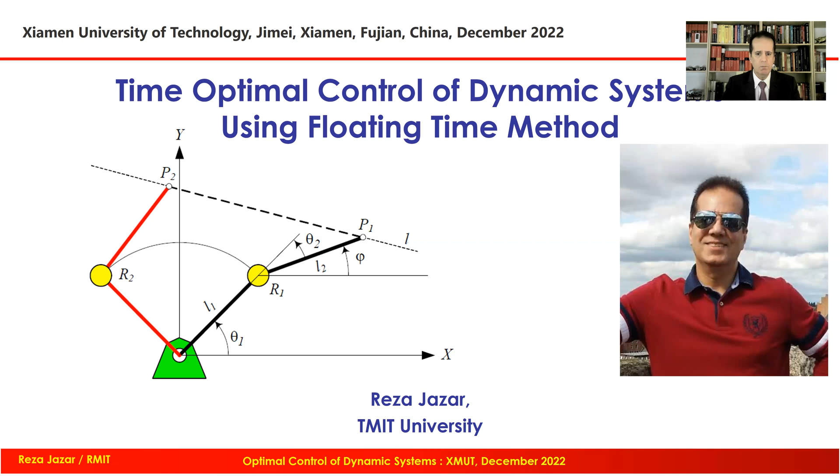Before starting the technical aspects of my talk, I'd like to share with you a few photos from Xiamen University of Technology. I was lucky to be there several times for teaching, research, and speeches, and I am hoping that it happens again, since during the past two to three years no travel was possible because of Corona. That's why we are presenting this research by video.

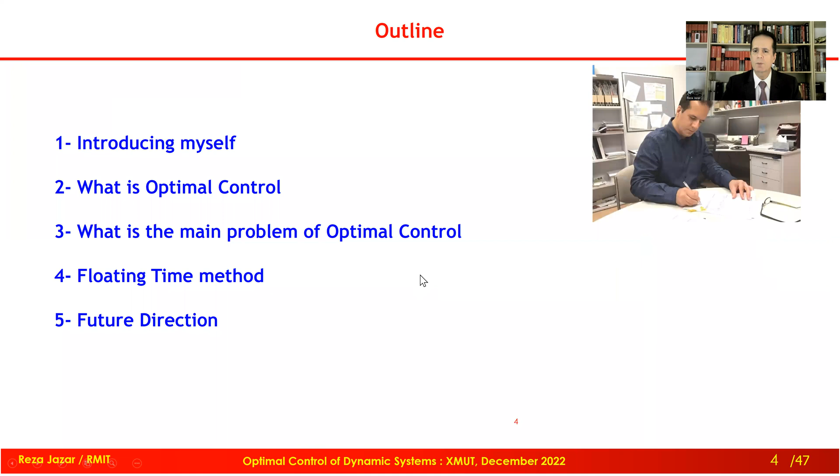Let me skip this part. I'd like to introduce myself a little bit and then talk about optimal control, the main problem of time optimal control, and then the floating time method, and probably discuss a little about the future of this problem.

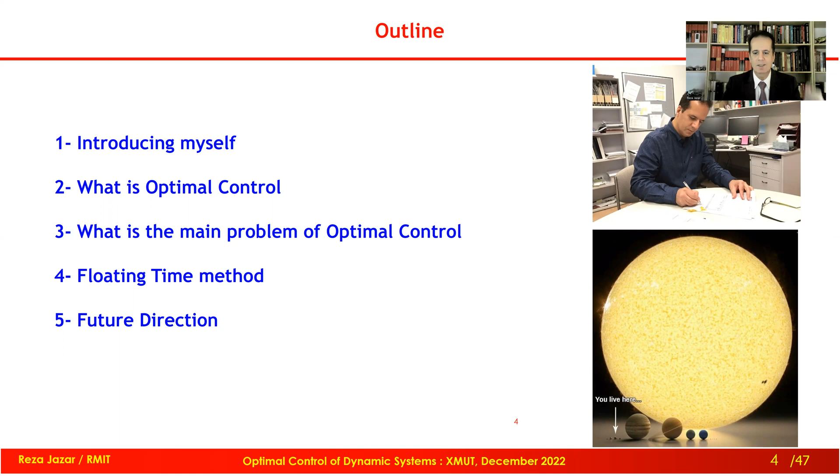On top right, you see me in my office here at RMIT, and I always put this photo, the picture bottom right, to remember that we are nothing basically in this huge world. Okay, so just remember to turn on your mobile phone after leaving the session.

This is my appointment at the moment. I am a professor of mechanical engineering here at RMIT Melbourne, Australia. I'm also honored to be adjunct professor of a few universities.

One of them is Waterloo University in Canada, which is the place that 20 plus years ago I was a postdoc, one of the best universities in Canada.

Also, I am distinguished adjunct professor of XMUT, and it is a great pleasure to be part of Xiamen University of Technology. Also, there is Ocean University, Xiamen Fuzhou, where I am adjunct professor as well - a fantastic, unique university in the world. Not many universities are doing what this university is doing.

For education, I graduated in nonlinear vibration and applied mathematics, and my master's was in robotics. In that master's, I introduced the floating time method, and I worked on that method, the thing I'm presenting to you today, for a few years. My bachelor's was about internal combustion engine design and so on.

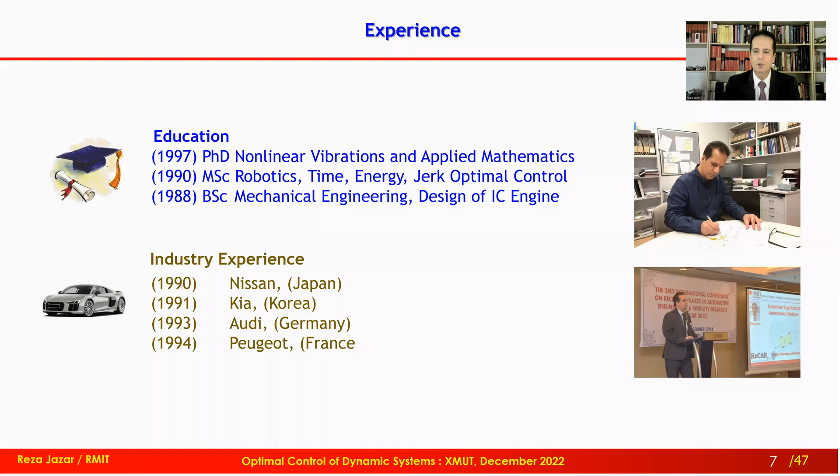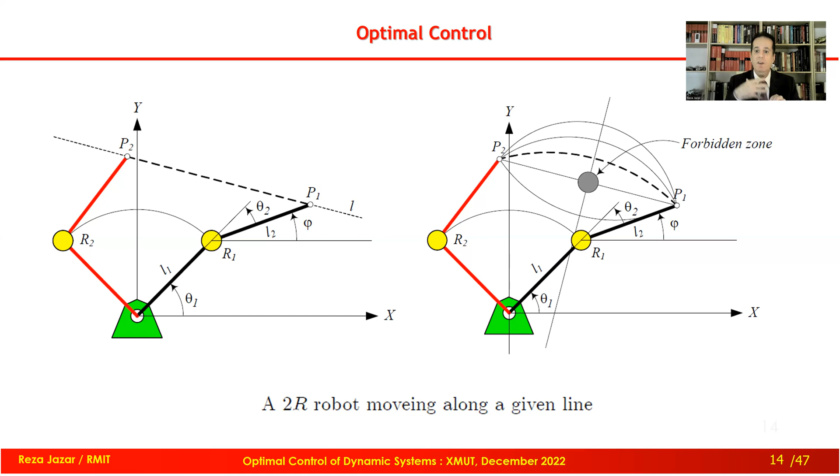And at the end of the second hand, point P, there is a payload. So this robot is carrying something. Now, how can we control these 2 motors to move the tip point, the payload, on the path that we wish in minimum time? That's the problem.

Okay, before going further, let's talk about optimal control, where and when it appeared in academia. Everything started with brachistochrone. Brachistochrone was first defined by Galileo in 1630 something, and later on by Bernoulli around 1690 something.

He introduced it. Bernoulli was a member of a family - brothers, father and son, grandson. The whole family were geniuses, very talented in mathematics. I believe it was Johann Bernoulli who introduced this problem for the first time.

Now, what is the problem? Under gravity, in a vertical plane, there are 2 points, point P1 and point P2. From P1 to P2 we have a wire. The shape of the wire is not changing, but we shape the wire.

Then on the wire there is a bead. We let the bead go, it slides on the wire, frictionless, and reaches point P2. We wish it goes from P1 to P2 in minimum time. Now the question: what shape of this wire gives us the minimum time? So it is a sort of minimum time path problem.

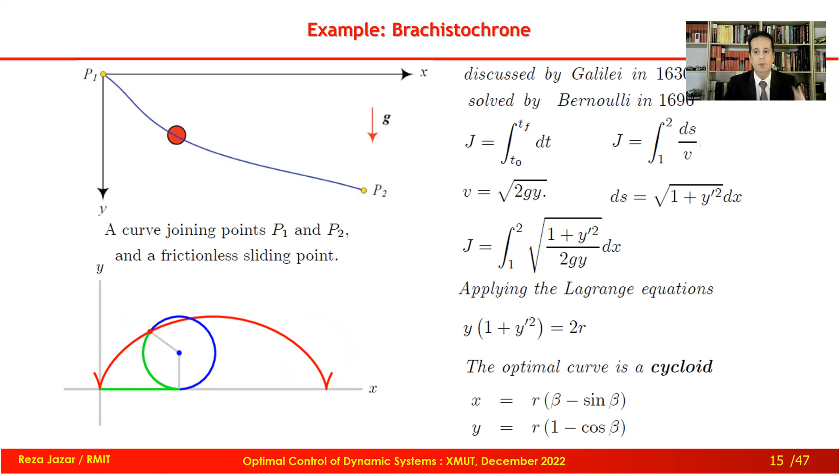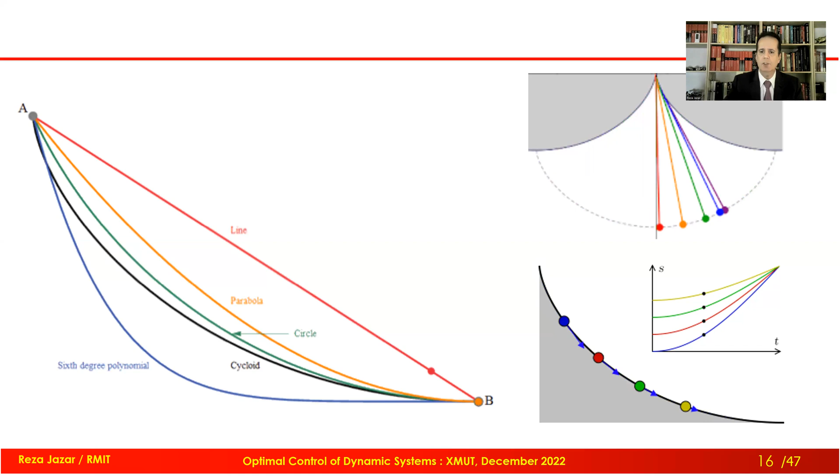Other guesses here, as you can see, parabola, line, or any other shape are not working as good as cycloid. Cycloid is the best solution. There are other applications on the right, and you know better. I skipped the explanation of them to save time.

Okay, I said that Euler tried to solve the brachistochrone problem differently, and that different approach introduced a new knowledge, a new science. Today we call it calculus of variations. Calculus of variations was something that Euler invented to solve brachistochrone. And today we know that calculus of variations is the base for optimal control.

There are some boundary conditions, meaning we know the value of x. X is the independent variable, and y is the dependent variable, so we are looking for y as a function of x. This is the solution of minimization of that functional J. The boundary condition is that we know x at the beginning and at the end.

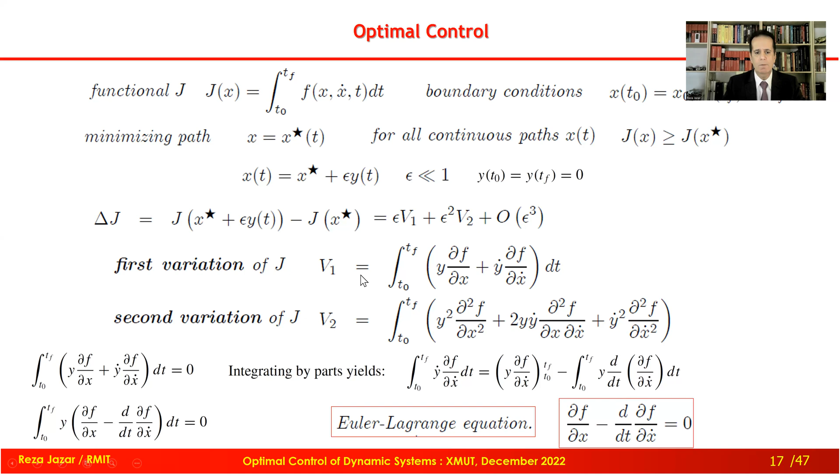Now let's look at this problem in a practical way. Let's assume we have a mass, like a car, like a box on a table. From some point x0, we are moving to xf. So from one point to the other, we are pushing a force behind it. This force can be positive or negative, so it is accelerating or decelerating. And I want to move this box from here to here in minimum time.

Let's assume there is no friction. If there is no friction and this force can go to infinity, I can go there in zero time, right? So whenever we are talking about time optimal control of a dynamic system, there is a constraint: actuation or force is limited. It cannot go to infinity. There is a boundary for driving force, a maximum and minimum. For simplicity, assume maximum and minimum are equal in absolute value, for example positive 10 Newton, negative 10 Newton. We can change them later. So when force is in the middle, it's zero force.

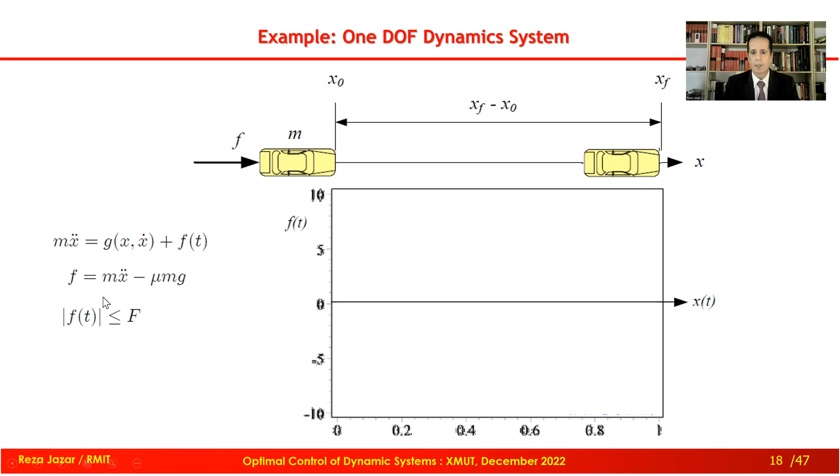That's the solution. The equation is given on the left, in the second line, you see F, which is actuation force, is equal to m x double dot minus mu mg. Mu is the friction coefficient, mg is mass times gravitational acceleration. So if there is a mu mg term, then F would be different. At the moment, let's assume that mu, friction, is 0. This is what we are going to do, and this is the solution.

Force is equal to maximum. Let's assume the maximum force is 10 Newton, and m is 1 kilogram. We apply the force 10. At the middle, meaning half a meter movement, we switch to braking and we stop at the end.

Now let's assume that friction exists, it is not 0. If there is friction, friction helps us to stop and prevents us from accelerating. It means I have to apply positive F a little bit more and then switch to braking. That switching point is important. The whole problem depends on the switching point, because we know that at the beginning we must apply maximum force, and at the end we must apply negative maximum force, or braking. Somewhere we must switch; that switching point is important.

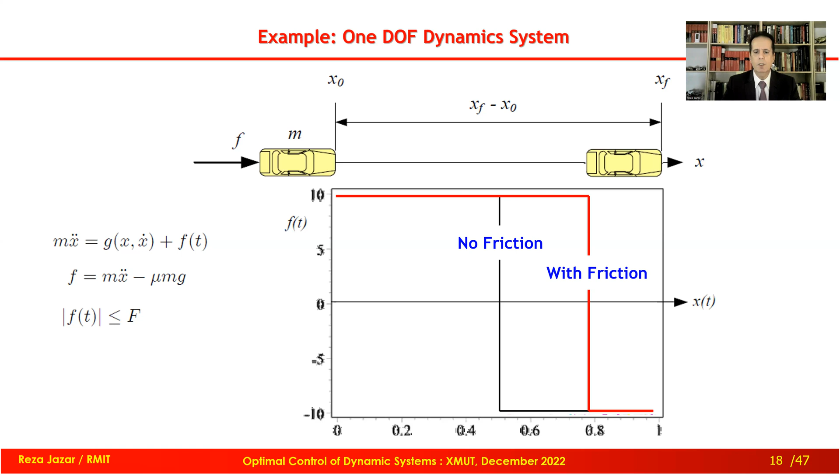If the dynamic system is 1 degree of freedom, the switching point can be found analytically. If it is multi-degree of freedom, it cannot be found analytically, so I am going to explain. But before going to multi-degree of freedom, let's see a solution when friction is there. The red one is the solution with friction, some value. At the moment, I'm explaining the problem.

Now let's assume that we have a multi-degree of freedom system, like this shuttle arm. You know that a shuttle arm is something similar to the hand of a human; it has 7 degrees of freedom. Shoulder, here, there are 3 rotational degrees of freedom. You can try 1, 2, 3: 3 rotations in the shoulder, 1 rotation in the elbow, and 3 rotations in the wrist. Totally we have 7 degrees of freedom.

Before going further, let me give you an explanation. 7 degrees of freedom looks strange. Why? Because when we want to locate or move a rigid body and bring it to a specific location in a specific orientation, we need only 6 degrees of freedom, not 7. So 7 means we have 1 extra degree of freedom. Why do we have 1 extra degree of freedom in our hand? What can we do with that, with our hand, or in industry with the extra degree of freedom of a robot?

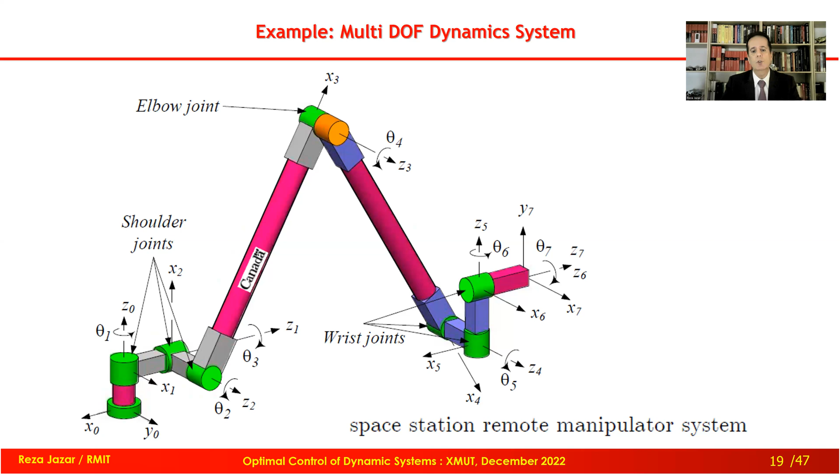Here we have 7 degrees of freedom, but it can go up to infinity, for example 10 degrees of freedom. What do we do with an extra degree of freedom? That is out of the scope at the moment, but you understood what a multi-degree of freedom system is.

Usually an industrial robot, if fully operational and fully actuated, must have 6 degrees of freedom. Usually 3 degrees of freedom go to the main arm, and the other 3 degrees of freedom go to the wrist. Here you can see a spherical wrist and a spherical arm, so totally you have a spherical robot with 6 degrees of freedom.

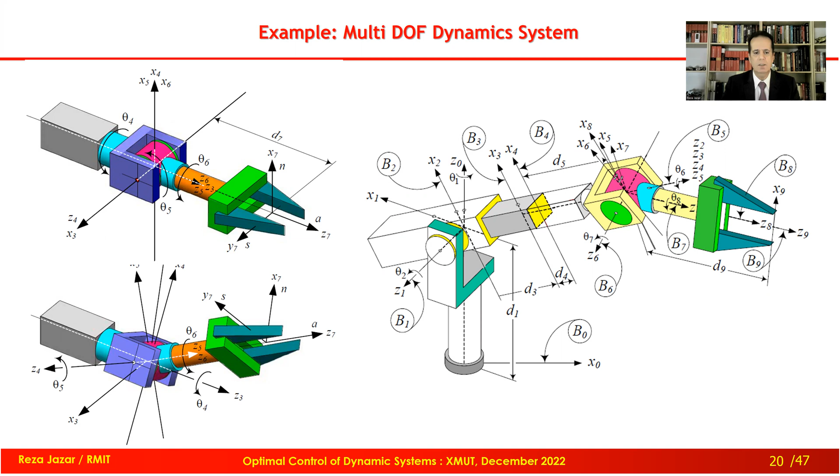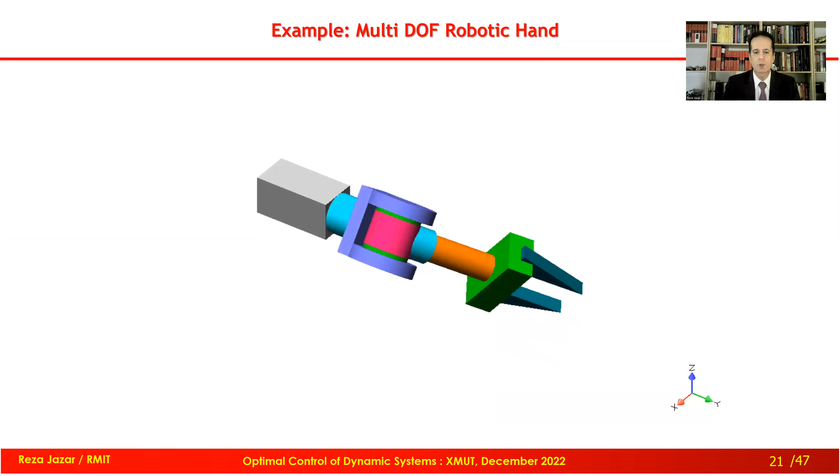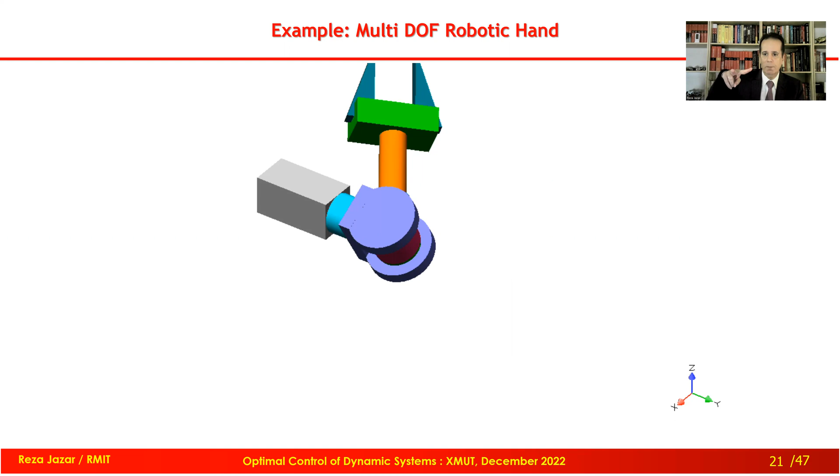Here you can see the motion animation for that wrist, which is showing 3 rotational motions for that. And there is another degree of freedom for the gripper to close and open to hold, but that's not a degree of freedom of kinematic motion.

Okay, now we know what is a multi-degree of freedom system. And I mentioned that switching point is missing. Let me re-express what is the minimum time control of multi-degree of freedom.

Imagine a 2R robot that at the beginning I introduced to you, 2 motors. If for 2 motors we apply the maximum torque that they can support, then the tip point is not going to move on the path that we design. So there must be a ratio, there must be a proportion, there must be a relationship between these two according to the equations of motion and the position of the end effector, inverse kinematics, and so on. All of them are in robotics.

But what is the solution of multi-degree of freedom? I said it is not possible to find the solution analytically. So what can we do? We need a numerical method. How do we know that a numerical method is actually the solution when we gain it? Everything goes to this gentleman, Pontryagin. Pontryagin was a Russian scientist, mathematician.

Around 1950, 1960, he and a few other mathematicians worked on optimal control in general, and he mentioned something that when I explain it, you understand it makes sense. He said, the optimal control solution of a multi-degree of freedom system will be achieved when at any instant of time, at least one of the actuators is saturated. So if we are able to find this pattern that at any time, at least one of the actuators—I'm talking about the 2R robot at the moment—one of the motors is saturated, meaning at maximum or minimum, then we have the solution. Looks very simple.

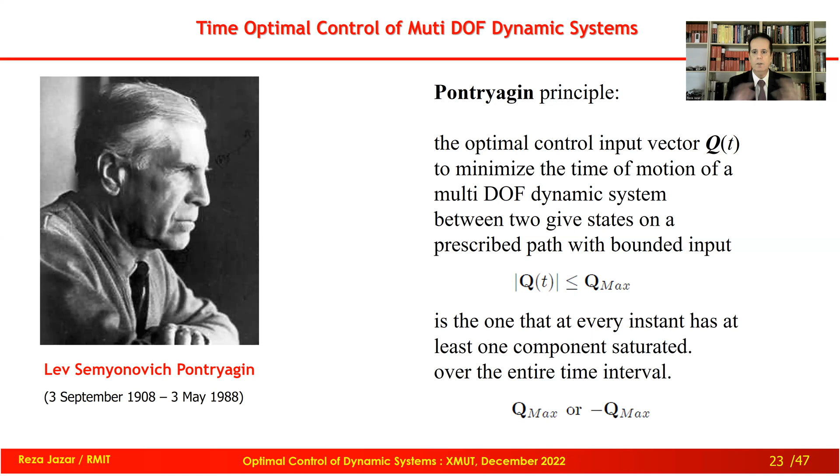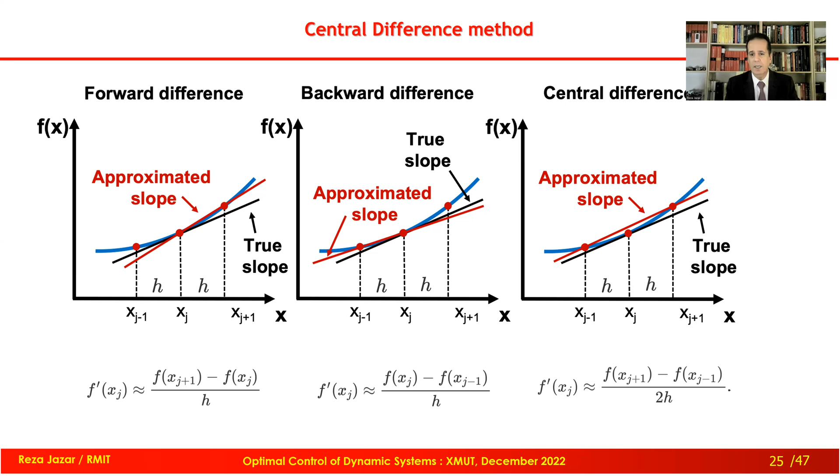Just look at the bottom right. F prime at some point xj is approximately equal to the value of the curve in front minus the value in the back, divided by 2 delta x. Delta x is usually constant, and we call it little h.

I'm going to adjust the ti's and find a pattern of these delta t, or tau, which I call floating time. I found the floating time somehow such that the sum of them is minimum.

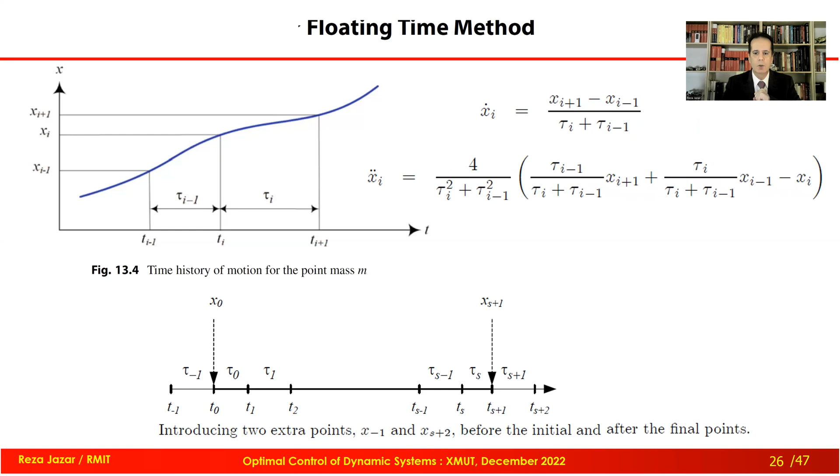First, if we develop the equation of central difference for first derivative and second derivative using floating time, these are the new equations: central difference for first derivative and second derivative. As you can see, the numerator is as we saw in the previous slide, but on the bottom, instead of having 2h, we don't have 2 h's.

We have two time intervals, and they are not equal. They are independent. And the second derivative would be that equation. We use the first equation twice to get the second equation. Not hard to find.

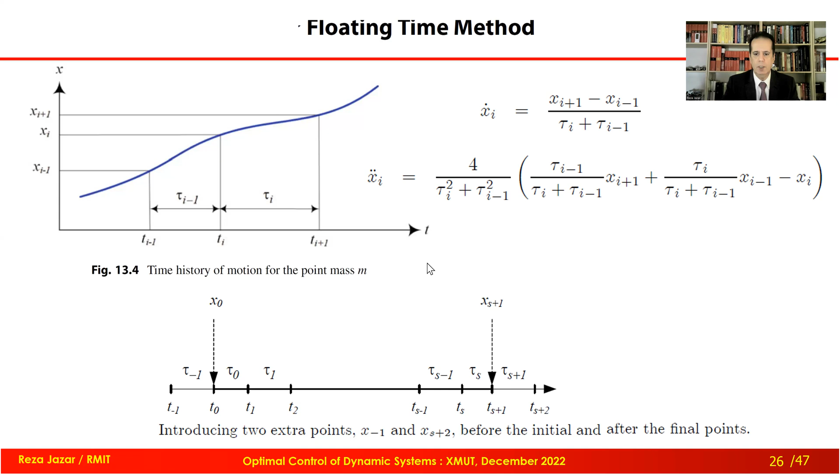Now let me explain those imaginary points, how we calculate them, and apply the method to a simple problem to show you how this method works. Let's get back to the same problem.

Mass m, 1 kilogram, is moving from 0 to 1 meter. Maximum force is 10 Newton or negative 10 Newton. And the time, as you can see, axis is here.

Now look at the initial condition. The initial condition is rest to rest. Because it is rest to rest, look at the x dot equation. If it is rest to rest, when I'm talking about x0, it says...

x1 minus x minus 1. In the numerator we have x1 minus x minus 1. X dot at 0 must be 0, so these two values must be equal. It means eventually we get x minus 1 equals x1, just numerically.

There is no such position as x minus 1; numerically these two have the same number, because we are moving from x0 to x1. In minimum time, the time interval must be the same as the previous one. So we found tau 0 and tau minus 1 equal to each other.

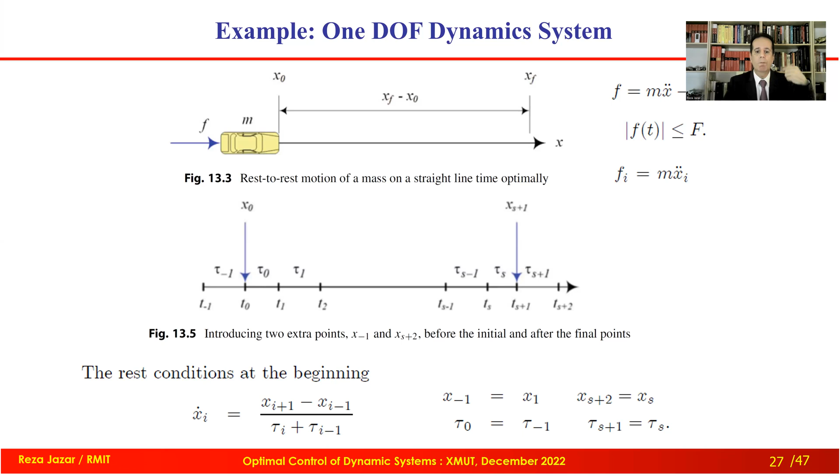Now look at the equation. The equation of motion is F equals mx double dot. So far no friction, and x double dot based on central difference is there. I'm talking about the beginning of the maneuver.

Left-hand side is the actual force. On the right-hand side, tau 0 is the only unknown parameter. Now, if I change the value of tau 0, the value of F changes. So I change the value of tau 0 until F is equal to maximum F.

If I make it shorter, this breaks the limit. If I make it wider, it is not using the maximum actuation. So there is some adjustment. We found the first tau 0.

We go to the next step. For the next step, we have tau 1. We adjust tau 1 to get F equal to maximum. So we do this and find all of these floating times until F is maximum, up to

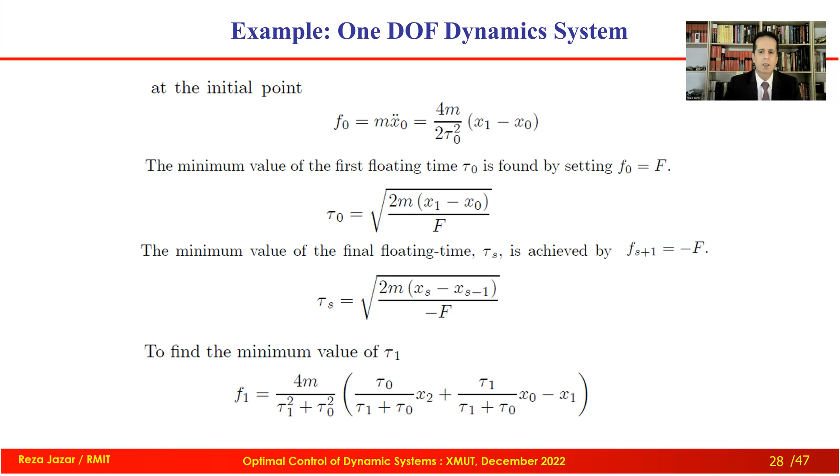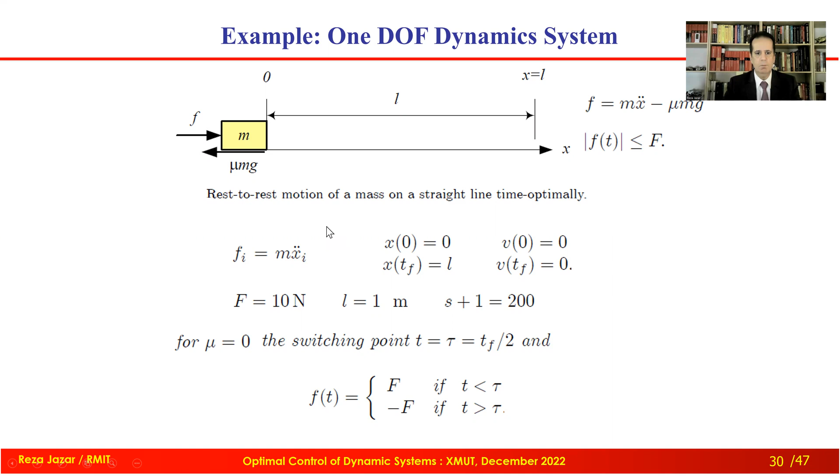I have to show you graphically. Let's assume these are the statements of the solution. We may have friction — I'll talk about friction later, but let's get back to what I already explained. Let's assume that here we

Now look at this. We calculate tau — tau is not shown here — and F is positive up to 2 points before the end. We know that the endpoint force must be minus F. So at the point before the endpoint, I'm talking about the last 3 points,

the middle point, I do not have any control on any floating time. The value of F comes from the equation because all floating times are already calculated: one from backward because the last point must have negative F, and one point from forward because we know that force must be positive F.

So as you can see, this F is breaking the limit. What can we do? We move backward. We throw one tau away and move the force from the endpoint to be negative F. And we move backward until we get the solution. Here is the graphical illustration.

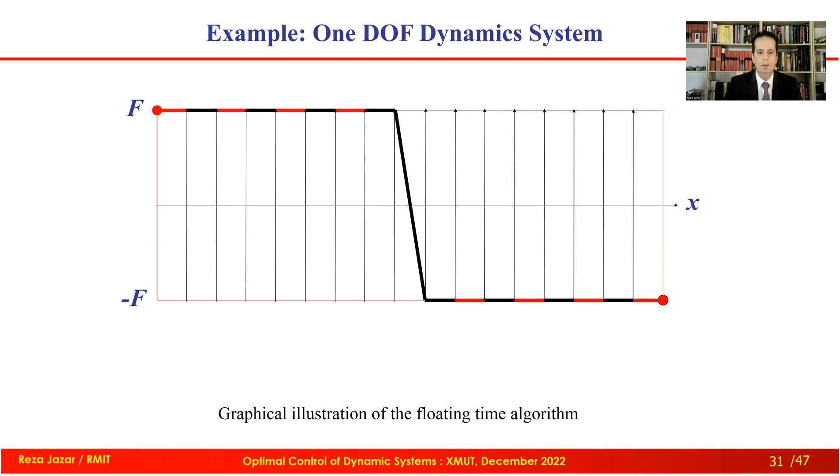Okay, let's apply such an algorithm to that mass, 1 degree of freedom, moving from one point to the other, with maximum force 10 and minus 10. When we have no friction, meaning mu equal to 0, total time would be 0.6019. It's calculated by computer.

I'm not saying that this time is physically achievable, around 0.6 seconds let's say. Horizontal axis is t, so this is in the middle of total time. When it switches at 0.3, total time for no friction is 0.6. So when there is no friction, the total motion will finish at 0.6 second, and the switching point is around 0.3 second.

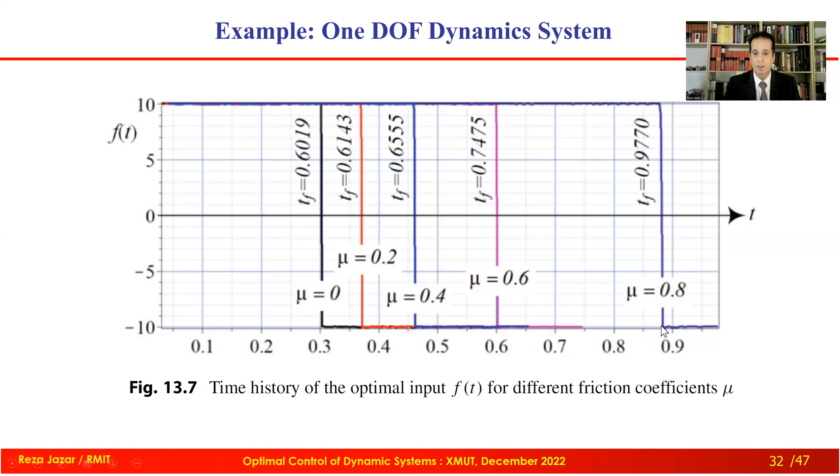When we introduce friction, total time will increase. Friction is a resistance we have to overcome, so total time of motion will change, the switching point will change. At 0.2 the total time is increasing, and by changing the value of friction up to 0.8, the total motion is around 1 second, and we are switching around 0.9 second. That's because friction is very heavy here.

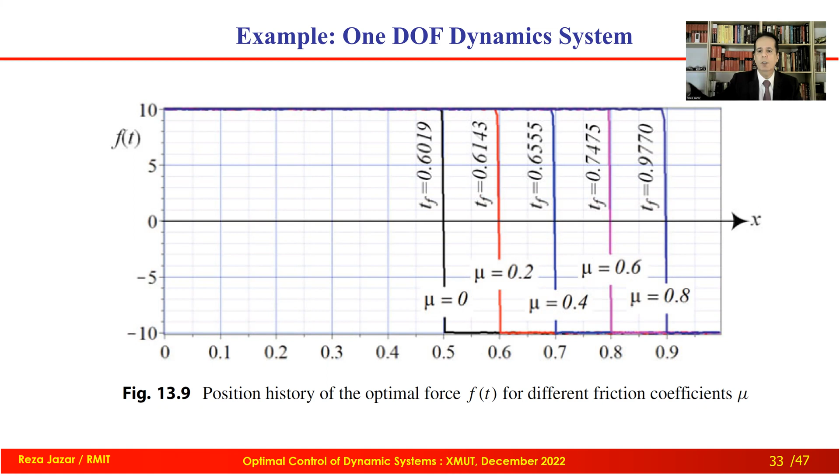Here you can see F as a function of X. Now, no friction, exactly in the middle. Middle means 0.5. The total length of motion was 1 meter, or we unified that. By increasing the friction, as you can see, the switching point, physically what distance it is at, will be pushed toward the end. And this is X as a function of time for the motion.

No problem, we can put whatever I said into an algorithm: changing one step to adjust F, then moving forward, then coming back when we brake. All of this is in this algorithm. I don't want to take your time to go into that algorithm, I'll give you the reference.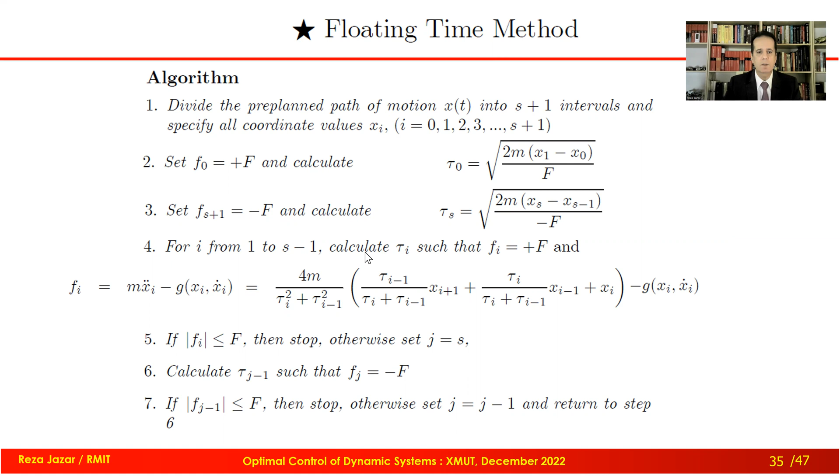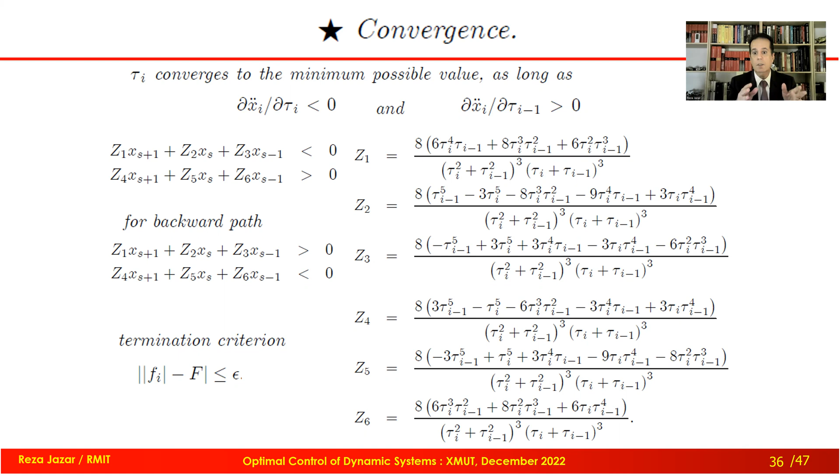When we have a numerical method like this, the question comes naturally: is there any guarantee that this method works? So there must be a convergence theorem, a convergence test, and it is done. Done means I introduced this theorem somewhere. I proved what the condition is for this method to converge.

Let's apply that floating time method to the brachistochrone problem and see what the solution would be numerically and analytically. This is one problem where the analytic, exact solution is given to us. I'm going to solve this problem again with the floating time method and compare these two.

Look at this. First, I'm starting from one point, which is 0,1, with two different endpoints. So two scenarios are being solved. One is from 0,1 to 1,0 — here, the blue one. The other, forget about the first problem — the second problem is from 0,1 to 2,0, the black one here. So two different solutions. We know that both solutions are cycloids, different cycloids.

We apply the analytic solution and find the solution here, for the first path, t equals 0.61084 — that's the numerical solution. The exact solution is 0.6176, TF1. This one is the analytic solution, the first one is the numerical solution. I believe I had 100 increments.

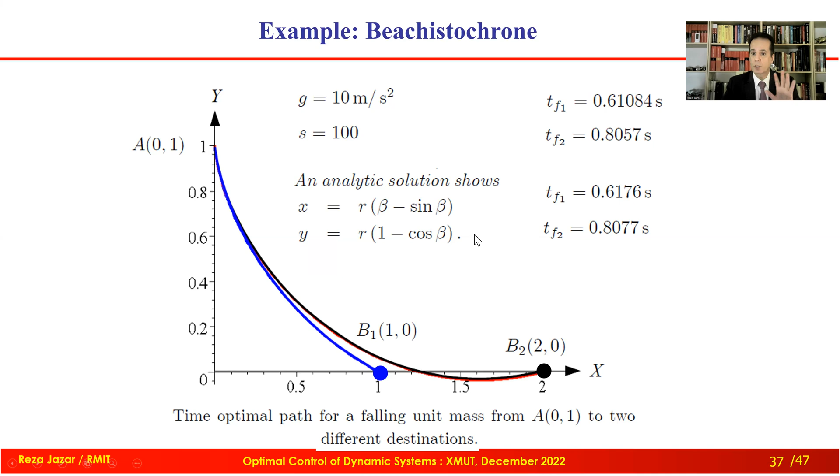For the second path, going to B2, the analytic solution is 0.8077, and the numerical solution is 0.8057. Physically, these two are very close, and when we increase the increments, they can get closer and closer. So it means the numerical solution works, at least as shown here.

Now, if you have n degrees of freedom, let me make it simple. Let's go back to the 2R robot. First, we assume that the first motor on the ground is saturated. We found the time, the first floating time. The time is the same space for both motors, so we use this and calculate the value of torque here.

Again, for the first motor on the ground, I assume it's going to be saturated. By keeping this saturated, I find the first time interval, the floating time. I use this floating time to calculate the torque value of the second motor. If the torque value of the second one is breaking the limit, this one cannot be saturated — that one must be saturated instead. So I throw that floating time away, assume this one is saturated, and find the time.

With that time, I come back and calculate the torque value here. This torque value must be within the limit, it cannot break the limit. But this is the value that torque must have when it is saturated. So because it was saturated, for the second step I assume this is saturated, find the time interval, and come back and calculate this torque value. If at any time this one breaks the limit, then it means this one must be saturated instead.

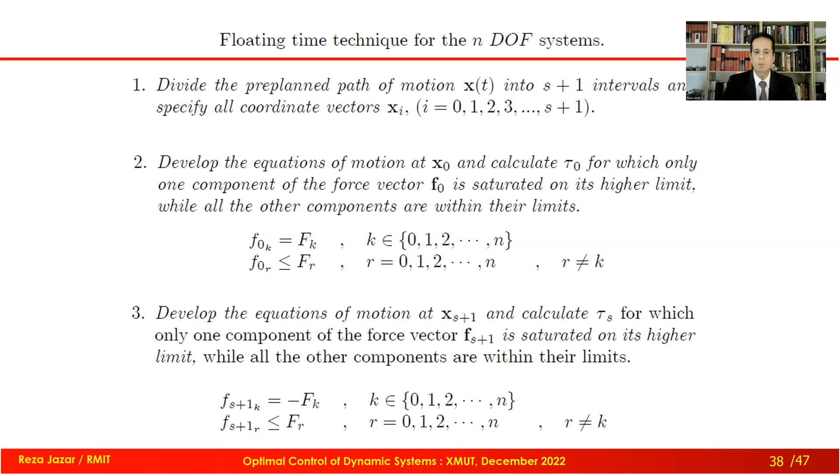I throw that away, I come here, I assume that this is saturated, find the floating time, and go calculate. And then with this structure, I'm able to calculate all torques. At least one of them would be saturated and the rest within the limit. That would be for n degrees of freedom.

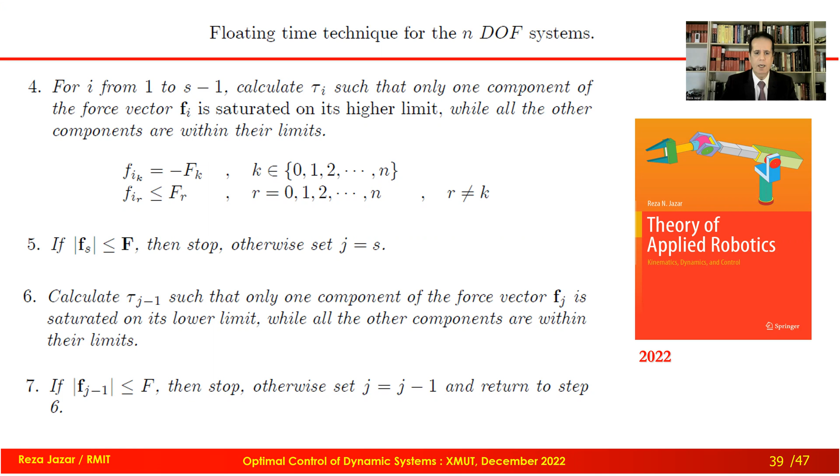Everything I explained is in this book, Theory of Applied Robotics, one chapter dedicated to time optimal control. I explained everything in detail, proof of the algorithms and convergence theorem, for example. So let's apply the method.

For example, here, a 2R robot, ideal. Ideal means the arms are massless, and we have two masses. M1 is the mass of the motor in air. M2 is the payload that the gripper is moving.

Let's assume that the robot is moving on a straight line from point 1, 1.5 to point -1, 1.5, on a straight horizontal line. So the path is given as a rest-to-rest condition.

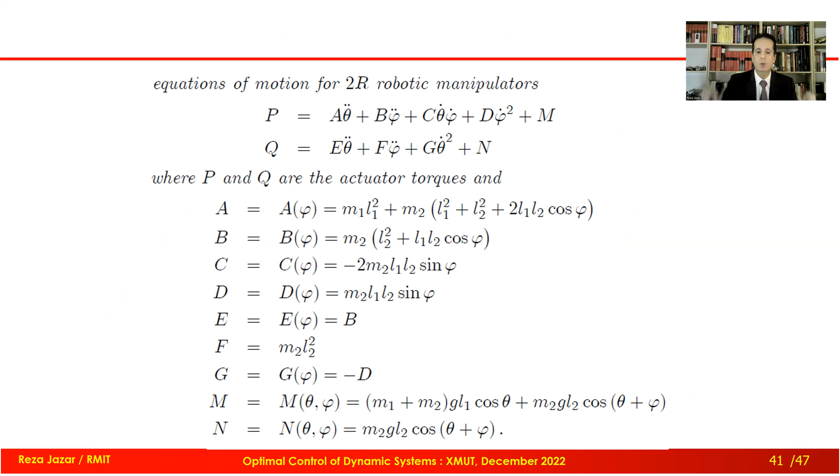The equations of motion are here, and these coefficients A, B, C, D up to M are expressed here. As you can see, A, B, C, and others are functions of the joint variables, meaning position of the robot. So they are not constant.

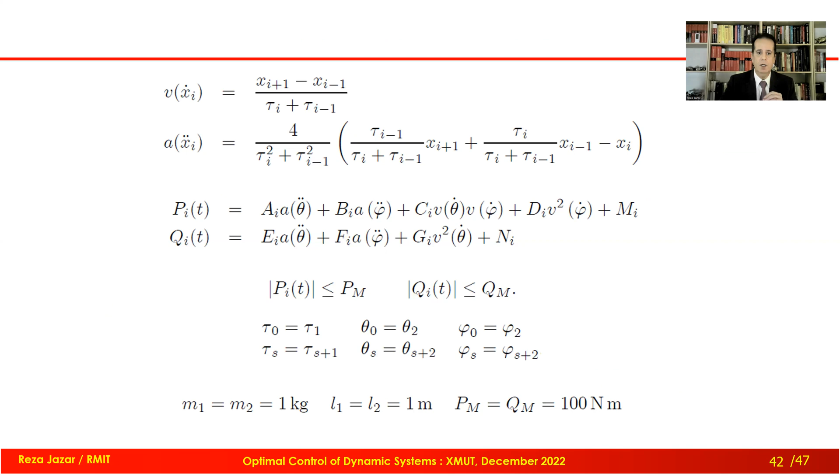A or V function that can be applied for phi and theta. What is phi and theta? Let me get back here.

We could have an absolute position for the second one, but we'd get a different equation of motion. This is the simplest way.

P is the value of torque of the motor on the ground. Q is the value of torque on the air, in the first joint or second joint. The first joint is on the ground, the second joint is in the air.

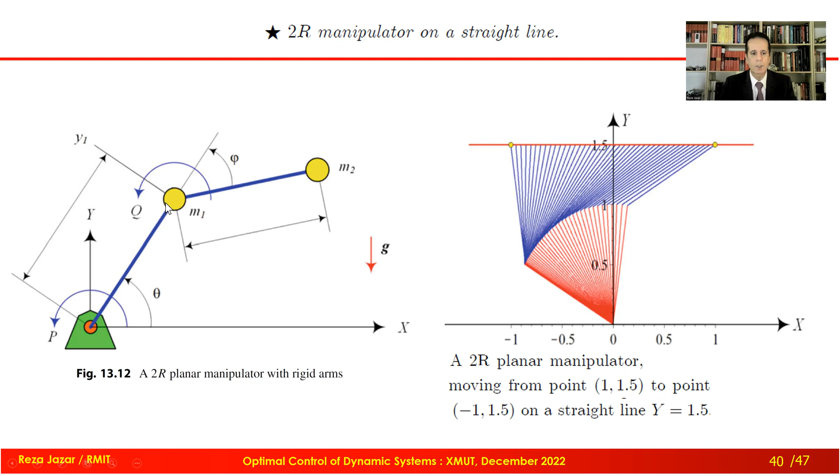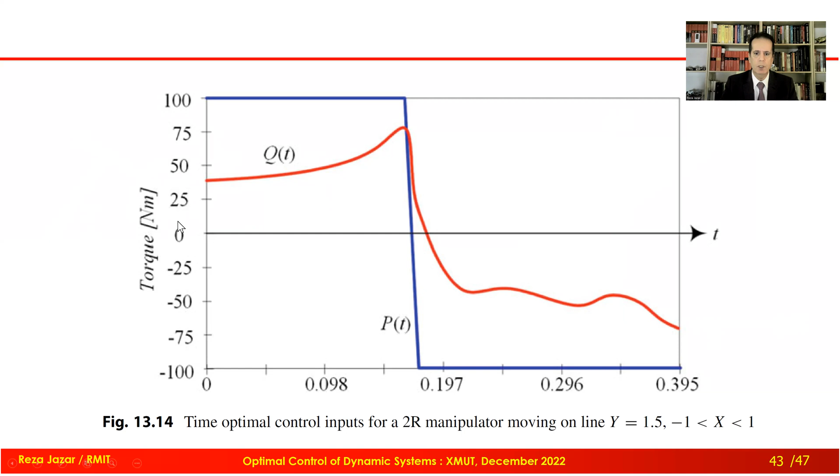Let's change—before that, let me show the solution here. See the solution. That's the solution, one more time. That's the minimum time solution.

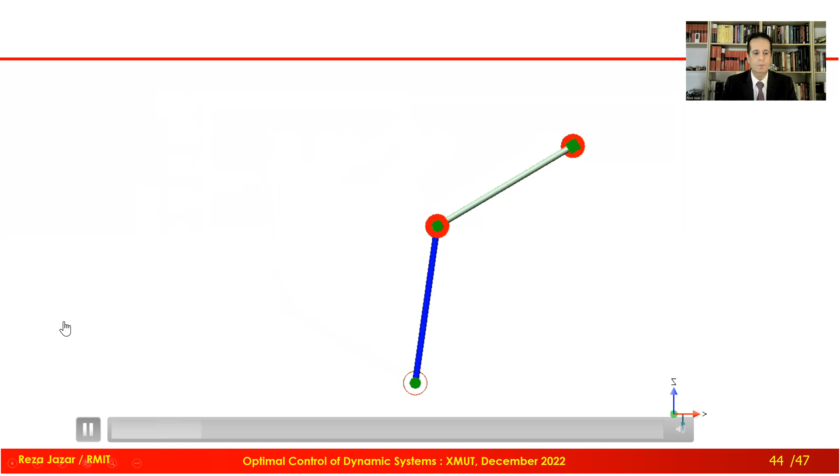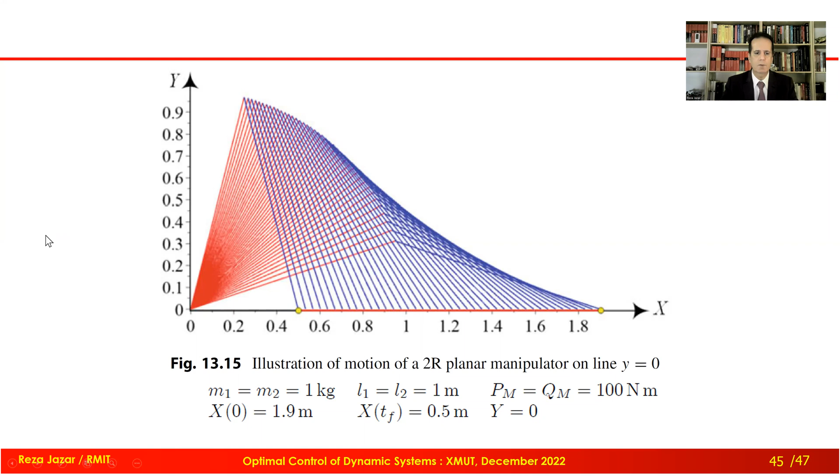Okay, let's change the maneuver and move the endpoint from 1.9, 0 to 0.5 and 0 on the horizontal axis. Let's see what happens. Again, same scenario: 1 meter, 1 meter, 1 kilo, 1 kilo, and 100 Newton-meter positive and negative. And this is the solution.

Magically, here, as you can see, the number of switching points is multiple. Let me explain. At the beginning of the time, on the left-hand side, the motor on the ground, the blue one, is saturated. The other motor is within the limit up to this point.

At this time, the motor on the ground, the blue one, doesn't need to be saturated. It cannot be saturated anymore because the motor on air is at saturation. So that one must be saturated.

As you can see, at this point the red one is getting saturated up to that point. Here, the switch—the other motor is saturated. And then another switching here. So switching points can be found.

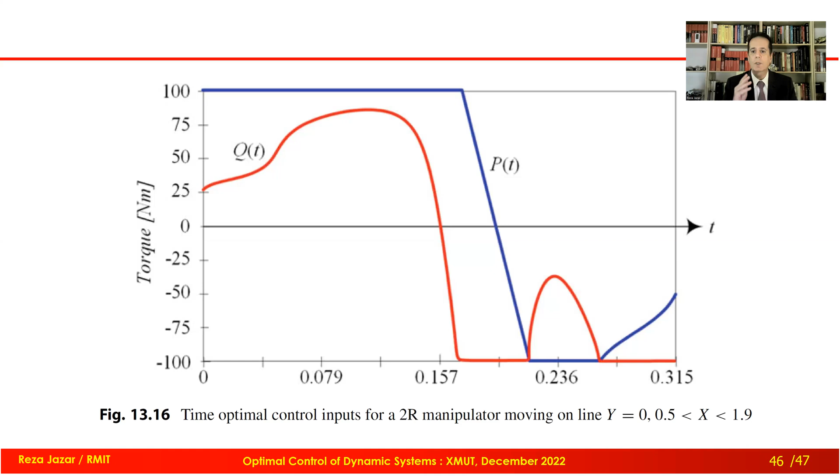The value of torque for every motor can be found, and we calculate at any time which motor is at saturation. That's the solution. The conclusion is that the floating time method is a practical, numerical method to solve time optimal control of multi-degree of freedom systems.

I explained a simple example, but we can add constraints—for example, maximum acceleration of the endpoint must be limited, maximum jerk must be limited, maximum velocity must be limited, and so on. So the number of constraints can make the problem more complicated, but it doesn't matter—this method can handle all of them.

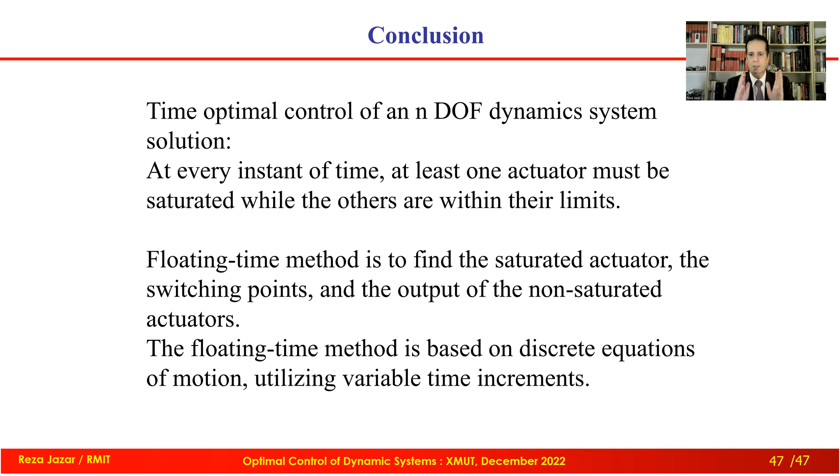Okay, we are done with this interesting problem, at least to me. I hope that you enjoyed that. If you have any questions, please email me.